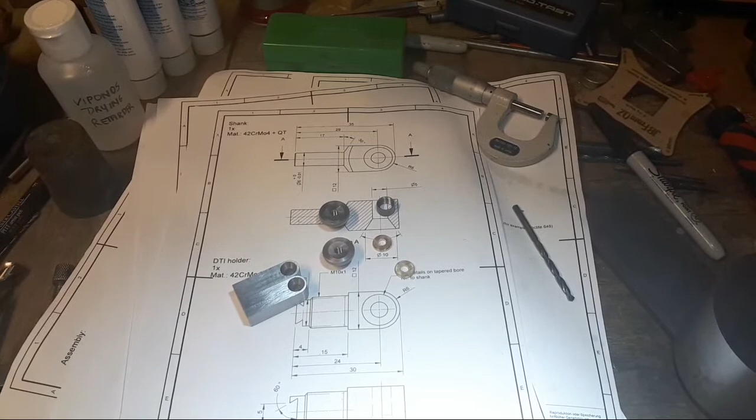It's pretty tough stuff, and you've got to cut a little bit deeper than the radius on your tool to get any finish at all, and that means a little bit of speed and a little bit of horsepower. And for single point threading, that's a little bit scary.

Anyway, what do I got, what's happening here? We've talked about that. Don't know, I got a piece of 4140 for that - flat belt pulley on the overhead drive. That's pretty awesome.

Craig, you're right, you've got to try a little bit harder and dig a bit deeper. Don't just try and skim cut it, get in and take as much as you can off at a time.

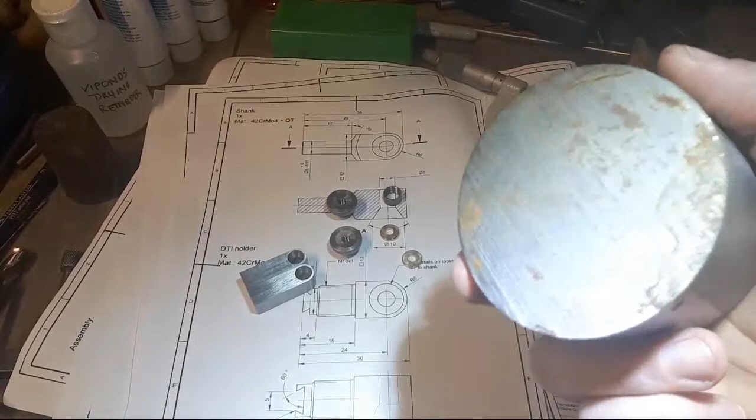A repeatable cross slide is pretty helpful for that. Hey Duncan - so that's a project, it's got to have an inch hole in it to go on the shaft, and there's a bit of a step on each end and a grub screw in the middle. That's all that's involved in that, and it should be right on size or a fraction bigger. Hopefully it's right on size, because I don't really want to machine the outside of it unless I've got to. But that's just a loose pulley for the shaft, so I've got reverse.

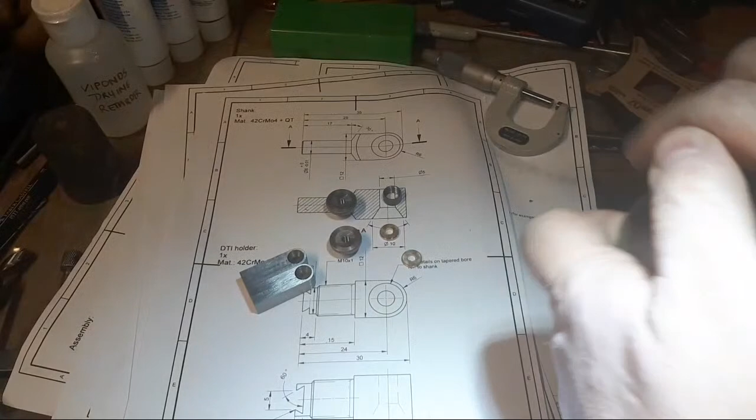That comes from Tasmania, from Tyne Valley Metals, or wherever he is up there, up behind Mathinna. Don't know why he's selling metals on eBay, but he's pretty good. It just takes forever to get here from there, especially at the moment. Hot Rod Guy, that's him. Seems to be the only guy that sells this sort of stuff in that sort of size.

Anyway, also got a bit of flat in the mail today. It's 50 by 6, that's for this project, which is the elephant in the room, I guess.

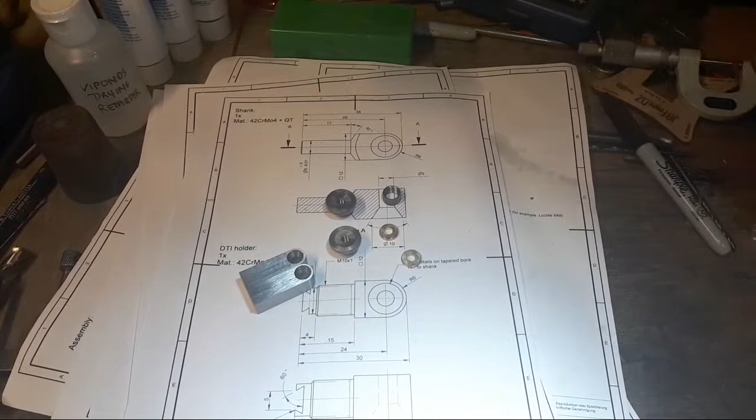Stefan Gotteswinter made these plans. You probably all know Stefan, he's a regular here, and he's got a pretty good channel, and he makes stuff. He's German. If you don't know Stefan, go and check him out, because he's an amazing guy.

But he made this set of plans, so these are getting a bit sort of oily, for this little indicator holder.

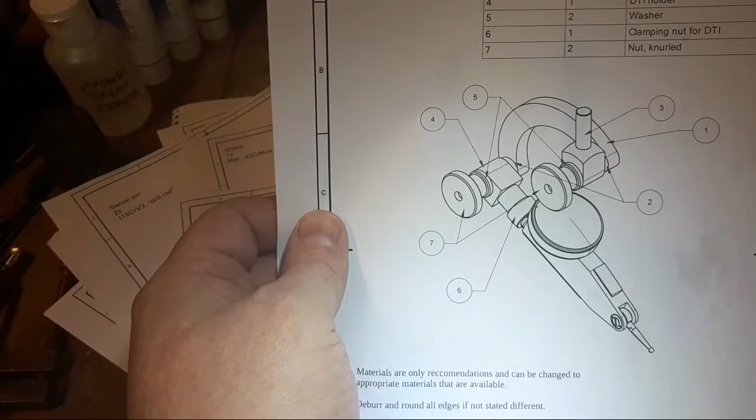He's kind of mad and a precision inspiration, if you want to put it that way, but don't speak too loudly, he'll probably turn up here in a minute.

He made this set of plans for this little indicator that he built, and it's sort of not as big as this drawing, to be honest. So I thought, well, I'll make a series of videos, and they're coming out. It's a fairly nice build.

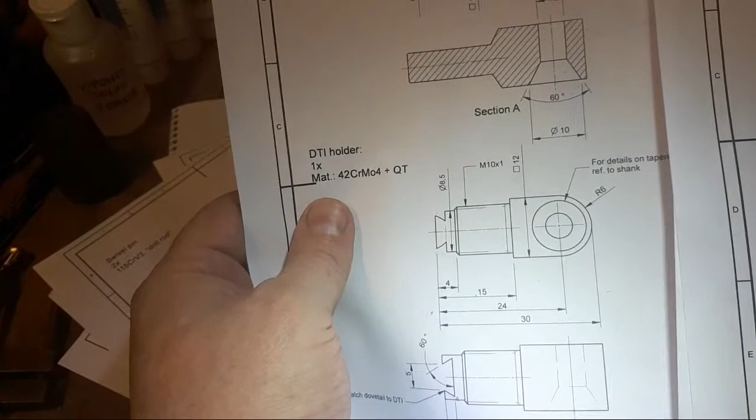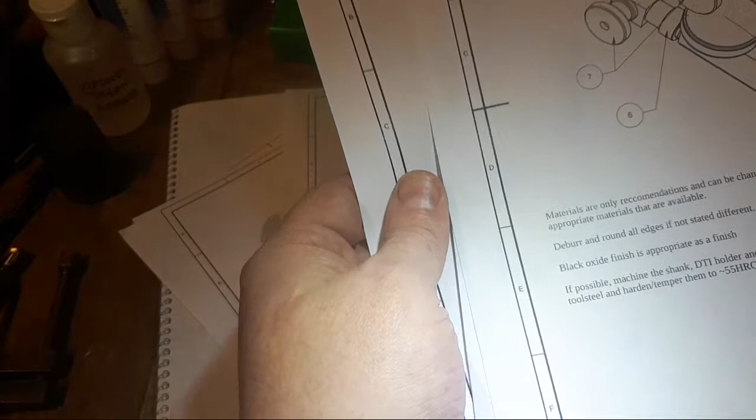He's probably listening because I just got a heart from him. So obviously he's digging in. Let's have a look at the counter.

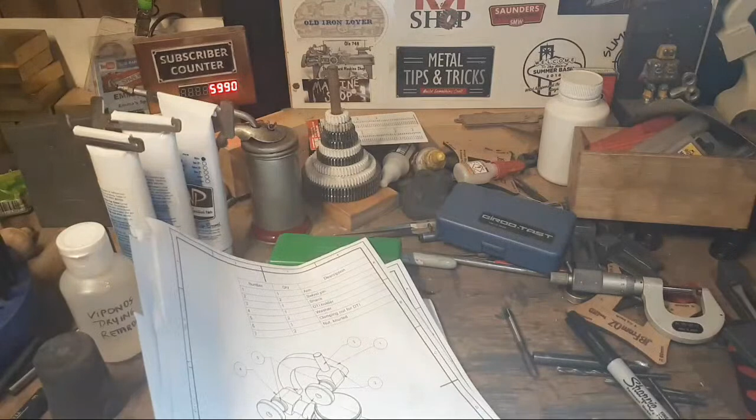So it's a pretty good little build, these plans are available to anyone. He did share them on Patreon, but he also, I think, shared them in the Facebook group if you're part of that.

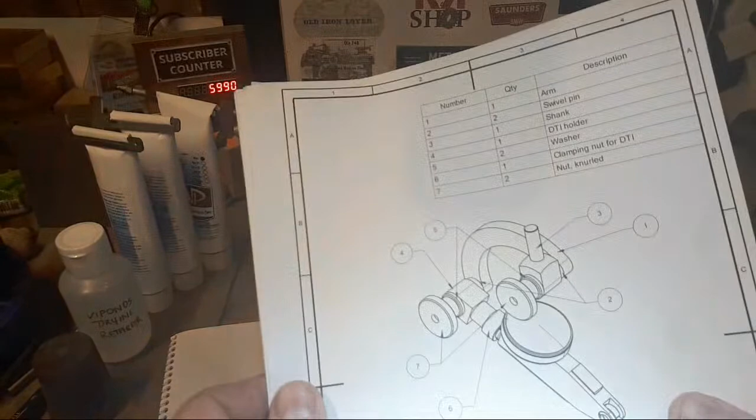I thought it'd make a pretty cool coat hanger too, but it's a bit flash for that. Anyway, where are we with it?

We've got 4 videos up, or 3 videos up. There's another one I uploaded, but I haven't actually looked at it yet. That's one way to do that piece, that flat.

I'm going to do it on the faceplate just as a half. I've been thinking about that. There are some challenges in it.

This little fine... oh, this stupid light. I'm going to switch that off because it's getting a bit of glare.

Well done, Aid, that's awesome. You've got a good channel, though, and you're a nice guy.

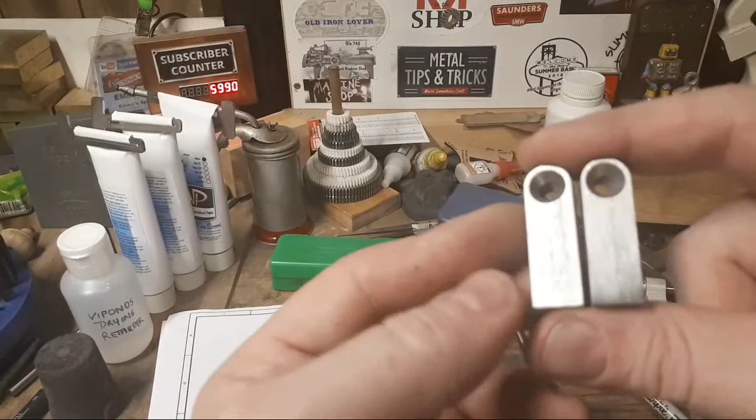So I do, you won't subscribe again, though. I just don't like my chances there. It'd be pretty funny, though.

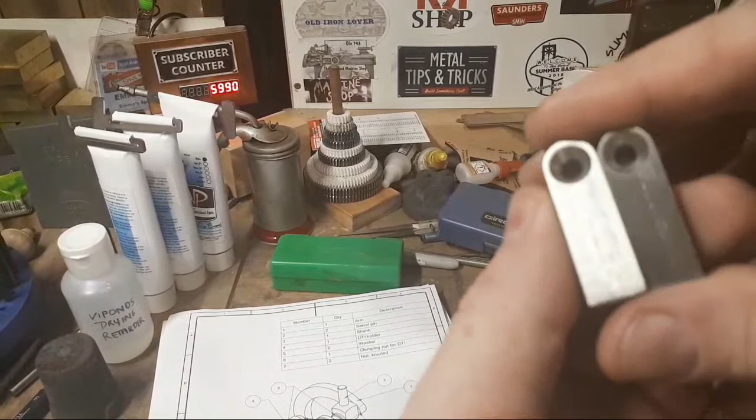So it's pre-hard 4140, but it's pretty hard. It's 45, 50 Rockwell and pretty tough stuff. Generally, when it comes pre-hard, it comes about as tough as you can get it as far as wear resistance, strength, but not particularly hard, so it's still machinable. If you soften it and then reharden it to 850 Celsius and then temper it to

about 500, 525, 530, something like that, you'll end up with this, which is excellent for wear parts and bits like that.

So, okay, standard pre-hard is 28 to 32. It probably is too. It's not as much as that, but it is pretty high tensile strength.

So one of them still has got to have a thread on the end of it and a dovetail, which is going to be fun. And that nut screws on there like that. And this one has a straight spindle to go in a collet or something like that. And then they've got pieces to go in there, and then that curved piece is cut out of this, I think. So this is a good project.

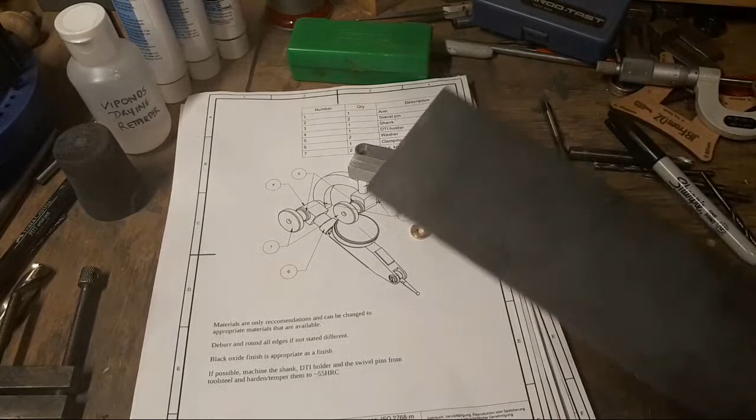These have all got to be blued. I'm probably gonna, I don't know whether I'm gonna color this, heat blue it, or whether I'm gonna just polish it, or whether I'm gonna throw it in the tumbler and give it that nice grey, abrasive finish, which I really like too. Don't know yet.

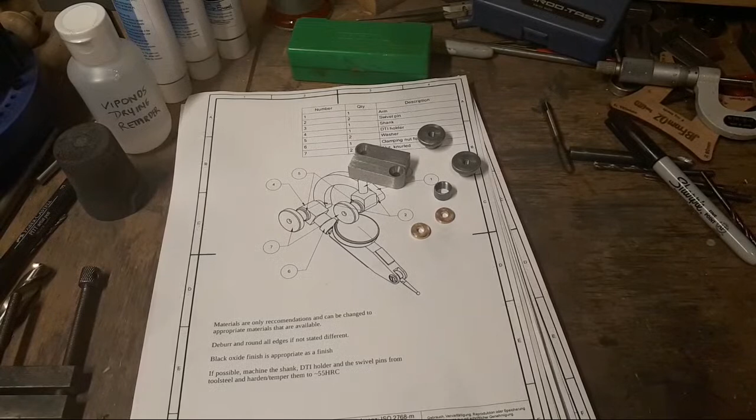Sorry about that. You're still looking at the camera, the counter. No, I don't even look at the counter very often nowadays.

I've got a couple of indicators that'll work with this. See, it's not going to drop off. It's smarter than that, see?

So I got a little Imperial Federal, which isn't a bad indicator. It's pretty loved, but it's actually not bad, and its zero's pretty good, and it doesn't need calibrating too far out or anything. It has got a bent or a slightly bent arm on it, which probably could be fixed too.

That's pretty awesome. That's what I probably would get to use more than anything. That's in thousandths of an inch or half thousandths of an inch, which is about where I like to work, something like that. I got Girod-Tast too.

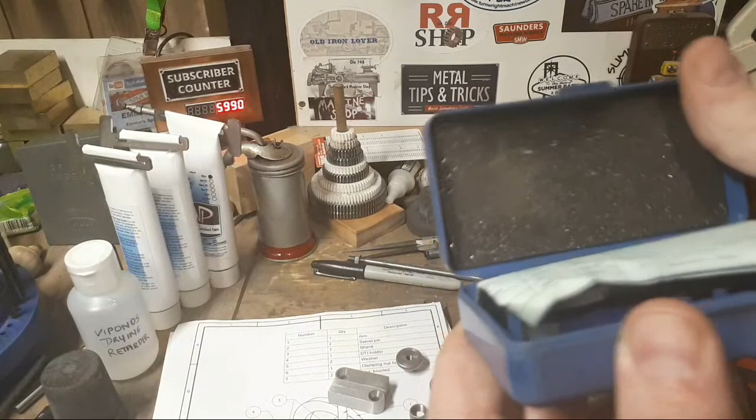Still hasn't dropped. This is crazy precision. Like, this is a beautiful indicator, but it's way too nice for me, really. It hasn't been calibrated for a little while. It's from 1999, so it's 20 years old or a bit more.

This is a really nice indicator, but it's way too precision and too precise for most of what I do. So at this point, I don't use that very often.

I've got a Starrett last word too, which is a different mounting system to the dovetail, but that's... here we go. We'll refresh that. There you go.

See, now you've done it. It's sitting on 0. This is pretty good. The last word

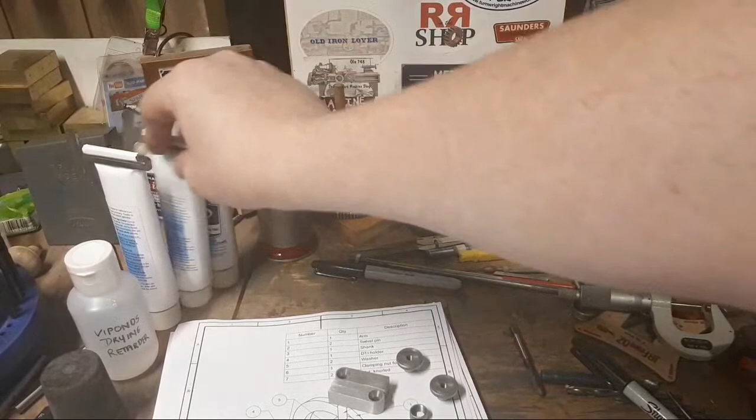Got some paint today, which is awesome, which means I can get on and finish my Coat Hanger 2020 project. If you're following, if you're even a little bit aware in this little community, there's this thing called Coat Hanger 2020, which is the Rustanox Coat Hanger challenge. Mine needs painting. I still have to paint the aeroplane for my coat hanger. So anyway, it's getting there. Slowly.

If you make things, join Coat Hanger 2020. That's pretty true.

Mahrs are worth fixing, Greg. Mahr indicators are usually worth fixing. Some of the others aren't, but they're probably worth fixing. And there are people who do them.

The resolution on the Swiss one, Craig. Second coat. Everyone needs a second coat hanger. It's got too many zeros. Thousandths of a millimeter. So that's crazy.

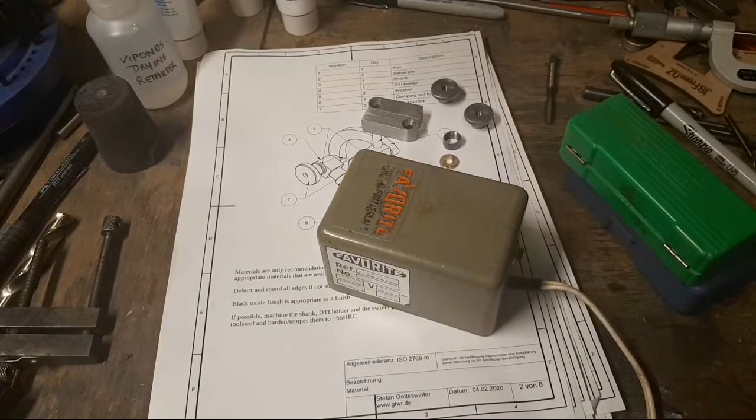What else? This is something that has been a bit topical at the moment. You should have, Ted. We expect content if you start making it. That's the trouble.

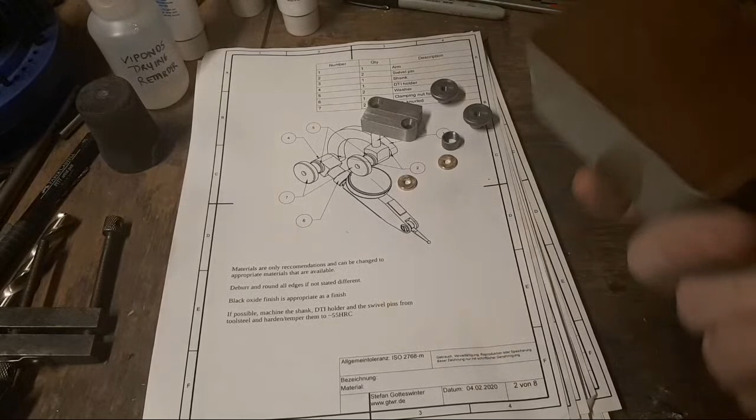This thing here, right? You should all look out and buy one. This is called a plate demagnetizer, or it's just a demagnetizer. There's a plate magnetizer, a demagnetizer. This one's a Favorit, which is now Horia, I think, which is the Swiss brand that's still going. I've had this for like 1,000 years. It's Favorit, they make good stuff.

They're now sort of absorbed into Horia. If you have a look at Horia, HORIA.ch on the web, there's a lot of stuff that you really would like and you can't afford there. They make lathes and stuff, and it's way out of everyone's price range. But this is a Favorit plate demagnetizer.

It's a pretty fantastic thing, really. I guess everyone's seen one, but everyone needs one, because to use it, you just drop something on it and press the button and pull it off, and it's just an electromagnet. If you press the button and push something in the middle and let it go, then you've magnetized it.

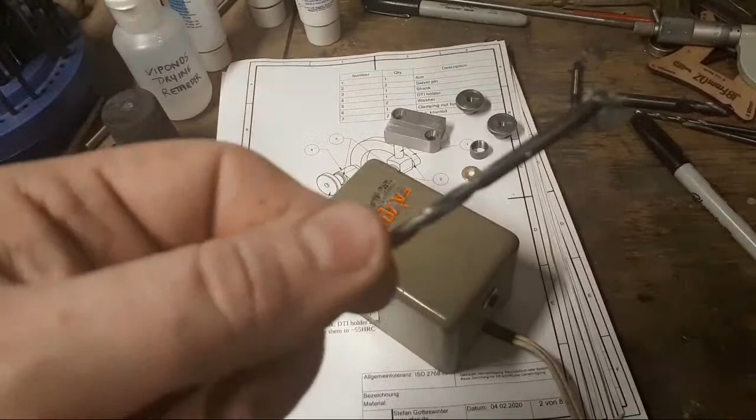We put this over here in the, see that? There you go. So you got a magnetic drill, which isn't much good to anyone. But if you pull it off like that and put it back over here in the swarf tray, nothing. Hey, Warren.

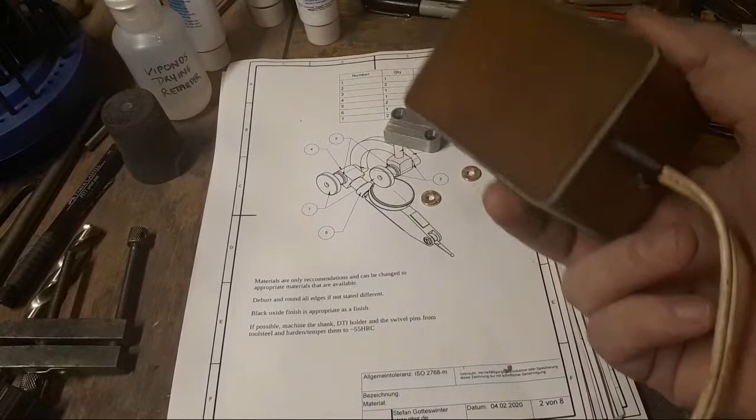So all it is, I think, is an electromagnet with a button. I don't think there's much else to it. And you press the button and the magnet polarizes the plate on top, and it'll demagnetize or magnetize something. So if you see one, grab one, because it's handy in a workshop, because everyone has magnetic tools and they drive you mad, especially at the moment with all these big conspiracies around. It's probably the 5G, but probably over time everything's magnetic.

Find them secondhand, like you'll buy it cheap. It's a fairly simple thing, and probably you can find a kit to make one without a lot of trouble. I believe, I don't know, this is all potted up, so I'm never going to pull it apart. But I believe that it's just a transformer or a coil and a plate.

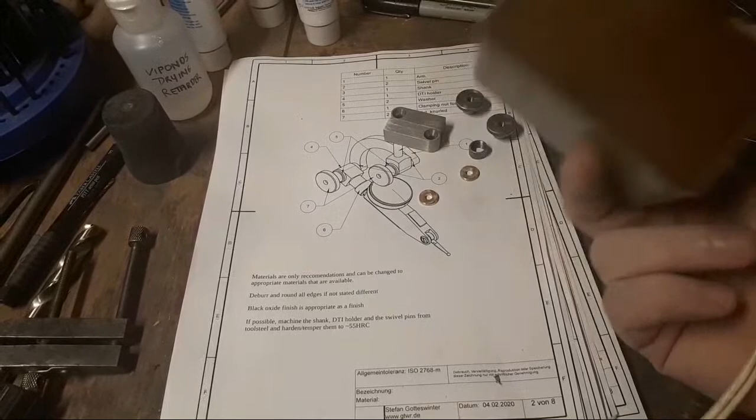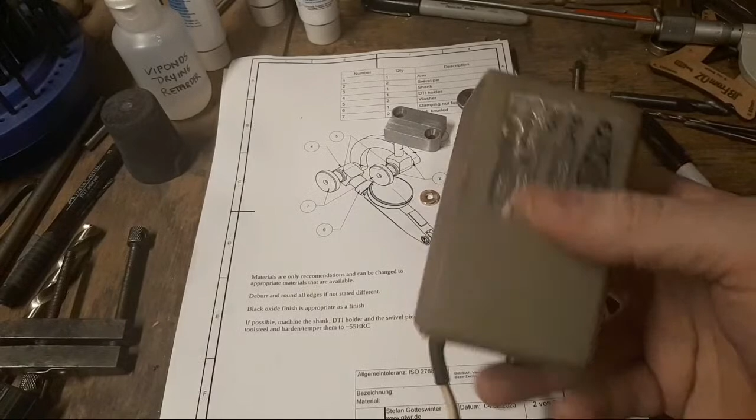But it's a good thing, and everyone should have one, because this has been around with me. It's been my bag to work once every couple of months for the last 10, 15, 20 years. And it's been here in the cupboard for the rest of the time. And every now and again, I'll pull it out and do it.

Yeah, magnetic calipers are the worst. This will fix them, absolutely. It's the thing. So if you find one, grab it. But don't buy a Swiss one from, it does say made in Switzerland, I think. Yeah, sort of. Don't buy a Swiss one, because they'll get expensive. People put a premium price on this gear.

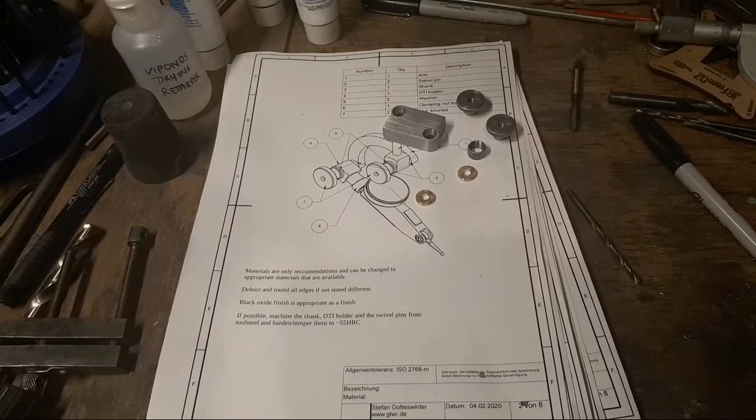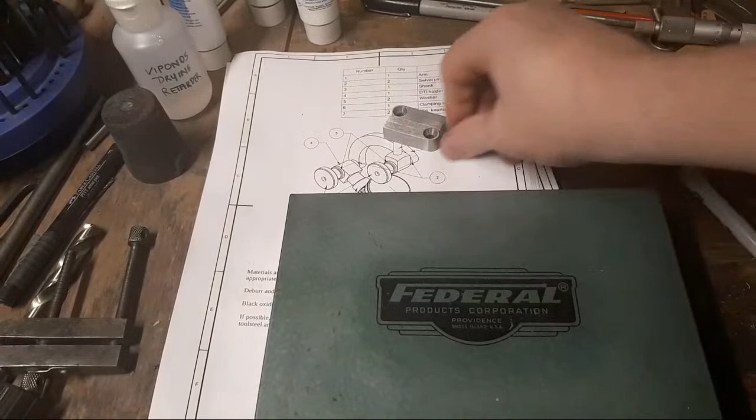I think that counts. YouTube subscriber algorithm knows that you've just unsubscribed. I think it's listening to your conversations, and I really think that probably you should get an ad blocker, or you should stop listening to the voices in your head and just pretend that it's not that important and subscribe anyway.

A bandsaw would be nice. It'd probably just use the buffered rolling average, like Craig says, whatever that is. This is another thing that I don't use often enough. If anyone has one of these and knows how to use it, especially you mechanic guys, do a video on it so we know how to set it up. I've got a rough idea and I know how I use it, but I don't want to make a video about it because I really don't think it's the way I should be using it.

This is a small hole gauge, from 1/4 inch to 1/2 inch, this one.

Chirpy, I have that problem too. That and Instagram creators. Instagram creators are terrible for giving me new projects. Don't know what to do about that.

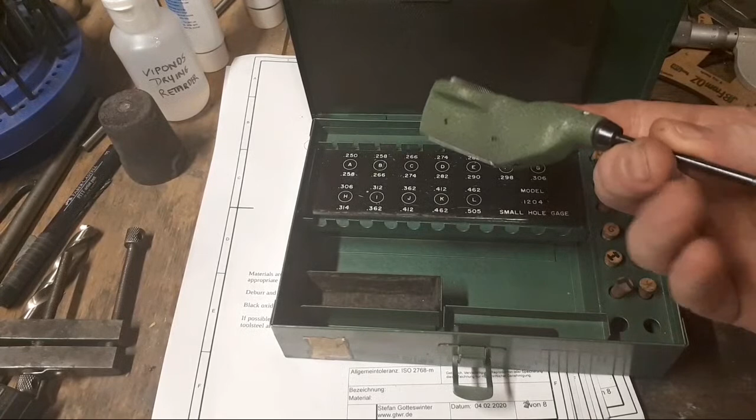But anyone who's a mechanic, I believe these are for measuring valve stem guides. It's a small hole gauge. I bought it on a whim and I use it, but I don't really use it for measurements. I use it for checking. I don't know if you can use it for measurements. If you can, I'd love a video from someone. Stephen Lang, we're looking at you.

But this one goes from 250 thou through to 505, so just over 1/2 inch. So you might know how to use this. Give me some pointers and I'll do a video, but I get it out occasionally. I haven't really put it on any videos because I really don't know enough about how to use it properly.

Yes, you calibrate it with a known dimension and then compare, Phil. That's the way I would use it, as a comparison gauge, but I'm not sure about that.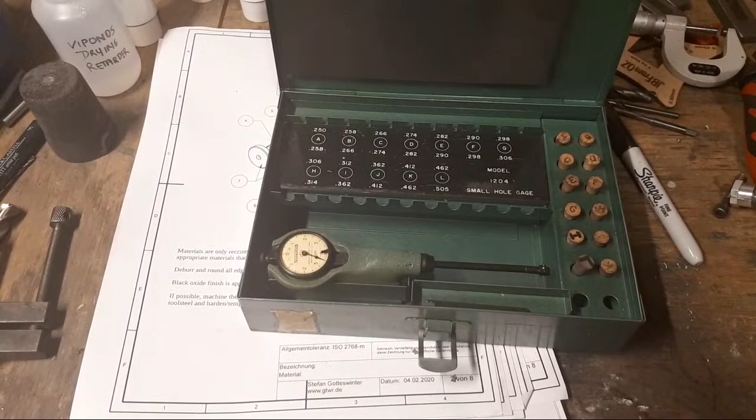I have this, which is a very useful thing. If you want a tool, let's have a look over here in the cupboard.

This is going to drive the price of these up. We'll get to that in a minute, Chirpy. This is going to drive the price of these up, and it shouldn't, because I'm still looking for them and they're a bit hard to find.

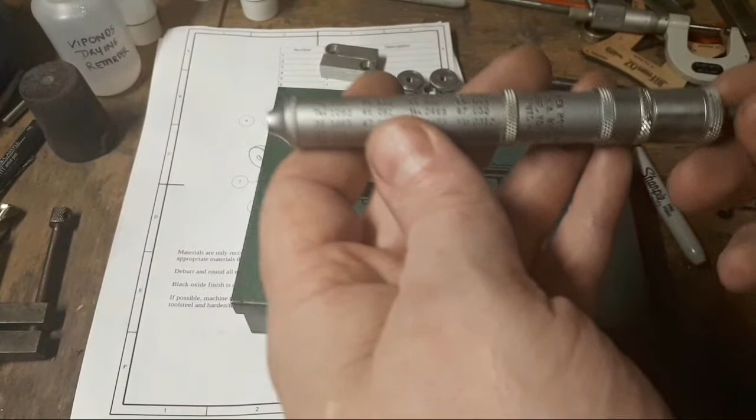This is a quick set gauge, or quick check gauge. It's a pretty basic operation thing, and if you've got a small hole to measure, you can do the same thing basically with a Sharpie and a sewing needle or something with a taper on it. If you push it in the hole and mark the sewing needle, then measure the diameter of the needle where it comes out, you'll get a reasonable dimension of how big the small hole is. However, this tool is designed especially for doing it.

And if you see them, grab them, or let me know so I can grab them. And all this is a tapered needle.

Let's see if we can focus this a little bit. Probably can't. There we go. We've got a tapered needle that pulls in and out, with a lock slider, and a window here that gives us a dimension on the rod.

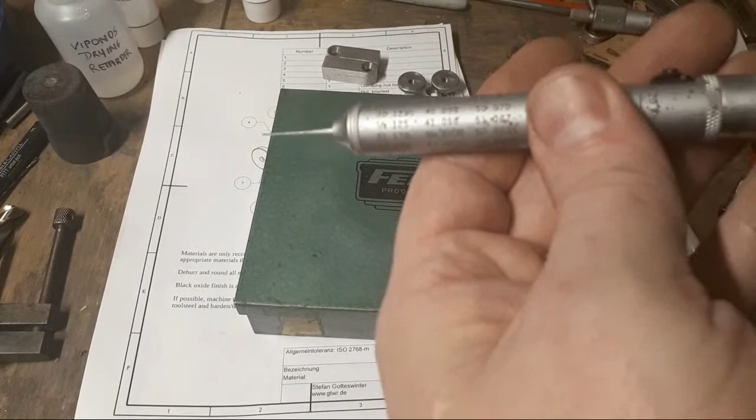So if we want, we slide that round so we can actually read it, and find that there's a needle, there's a line there and a dimension. If we want to measure the diameter of a small hole, what have I got here with a small hole in it? Really good question.

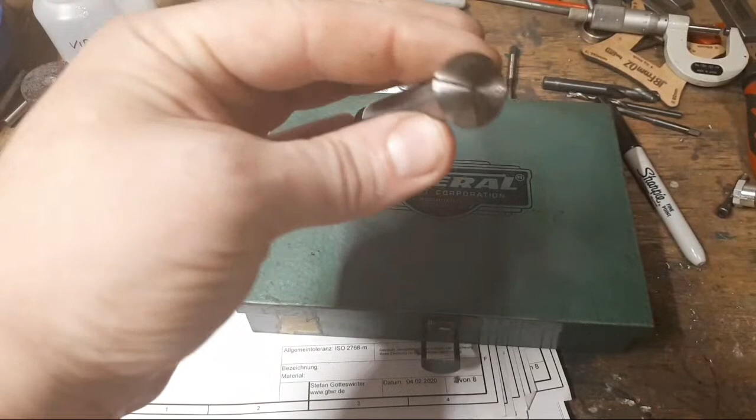So that's a pretty handy thing, and they come in different sizes, and I'd like a metric set for work, but it's never ever happened, and I could buy a new set, but they're kind of crazy expensive. But for what I do, they're a pretty useful thing to have.

So basically it's a cylindrical taper gauge, like Craig says.

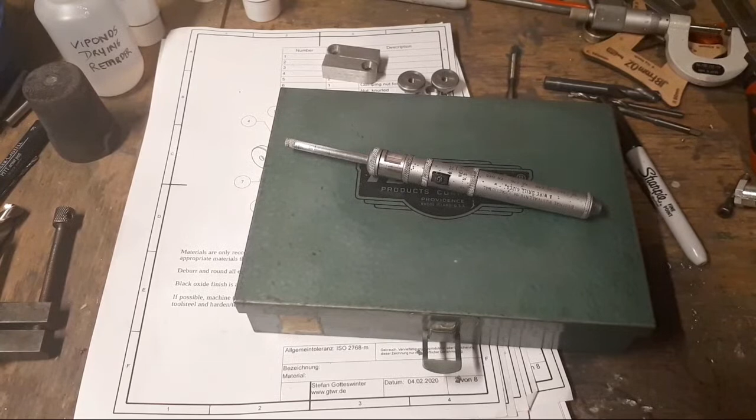Hey Rusnox, good to see you back. Coat Hanger 2020, go and check out Rusnox's videos. No video from me on Coat Hanger, but if you watch this space, it's not far away now. JB's got a Burnerd ER collet chuck, if you want to catch up with someone. Oh no, that's you. Okay.

So that's a tool that I use a fair bit, and for small hole diameters, it's pretty handy for checking. But gauge pins are nice, it's just that they get crazy expensive to buy a set. I'd love a set of gauge pins from, say, 1 millimeter up to 10 millimeters, but I haven't got room for them for a start.

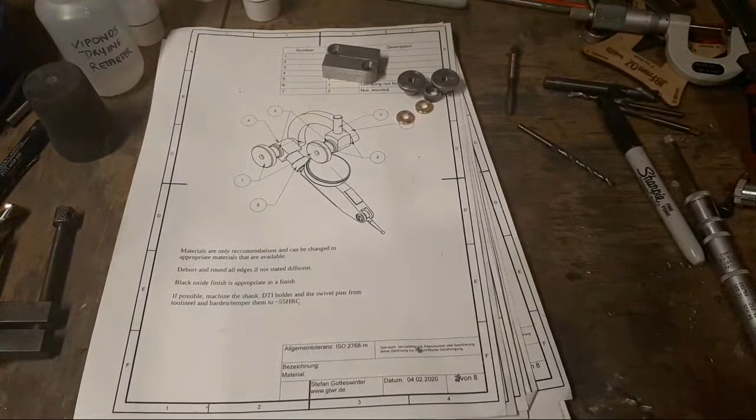Tiny to 1/2 inch is nice. Don't have the work for them. But there you go. Thanks, guys. Really appreciate that. Time to celebrate.

Speaking of Stefan, I've taken another leaf out of his book. Today, I guess by way of celebrating the 6,000, I bought a label maker. So I need to get some of this stuff organized. Everyone does this and it doesn't really work. You put all your taps in one box and dig around for them until you find the right one, then drop it back in the box like this. It's a metric tap, and you've got to look for it again. So thanks, Kevin. Thanks, Mike.

Make one that says 7,000. Good night, Poppy. I'll send you an email.

Never change it, leave non-square. It's square - see, it's an optical illusion. If I hold it in exactly the right spot, it is square. Look at that. It's less square if I put it out there. But anyway.

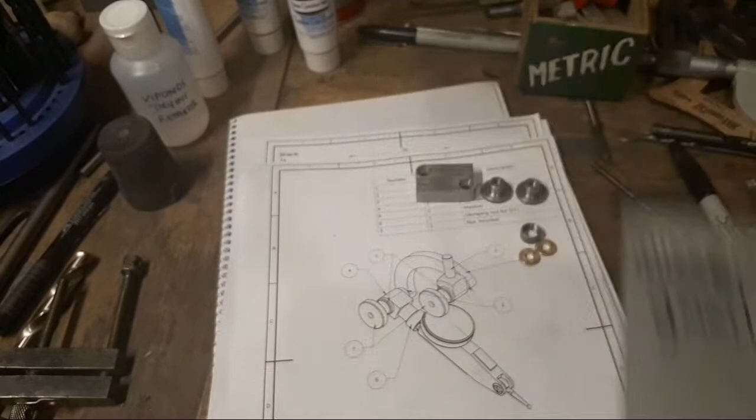Chirpy, yeah, look, there's going to be some engraver footage for this. There's some work that I'm going to do with that. It's got some problems still - my pantograph engraver has some issues in that it's got some backlash in all the joints, right? It was probably okay when it was made, for about a week, but it has worn a bit. So there are ways, I think, to modify that, and it's one of the jobs that I'm going to need thread cutting for. So at some point I think that will happen, but right now it's kind of a little bit shaky, and you've got to be a bit fussy using it because you get a little bit of error and a little bit of backlash, and that's not particularly good when you're engraving.

Take care, Cam. Good to see you. Good to see a video this week.

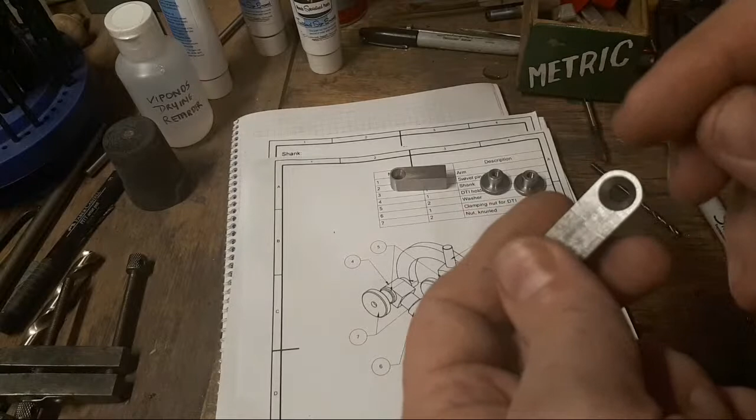Anyway, so I intend to get my pantograph going properly, and it's not something that I've forgotten by any means. I've put a fair bit of time into it already. It just needs some backlash taken out of it, and probably with tapered seat joints. I think if you make the joints on a taper, something similar to this, with an arm that goes through on a taper with a reamed hole with a nut, or a screw that locks down into a reamed hole with a lock nut, I think you would find that you would alleviate a lot of backlash that way, rather than the parallel holes that are already in the arm. So that's what I'm working on.

But eventually I'm going to have to make new screws. I'm going to need thread cutting. So I've got to finish the thread cutting attachment. And yeah.

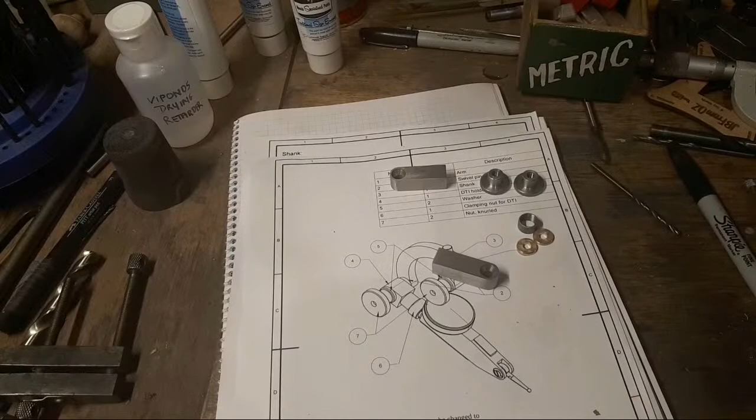John's probably a bit like me. I sit down and I film this project in detail, so there's going to be about seven 20-minute detail videos - making this part, making this part, etc. But you need time to do that. It's a fairly labor-intensive process, and you don't end up making a lot of progress in the limited spare time you have doing that. But it's fun.

Who's this chirpy guy? He keeps making funny noises over there in the corner. I don't know what he's about. Anyway, yeah, I don't know if anyone knows what that chirpy guy's talking about.

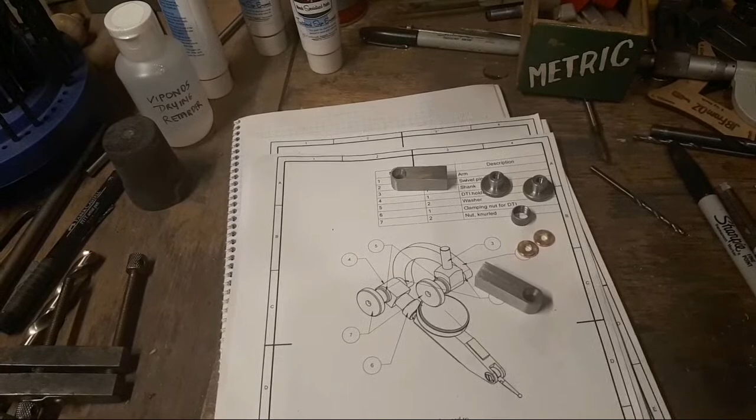Look, steady rest. It's right here. Okay, it's awesome. This is what I'm saying about buying one-off castings, right?

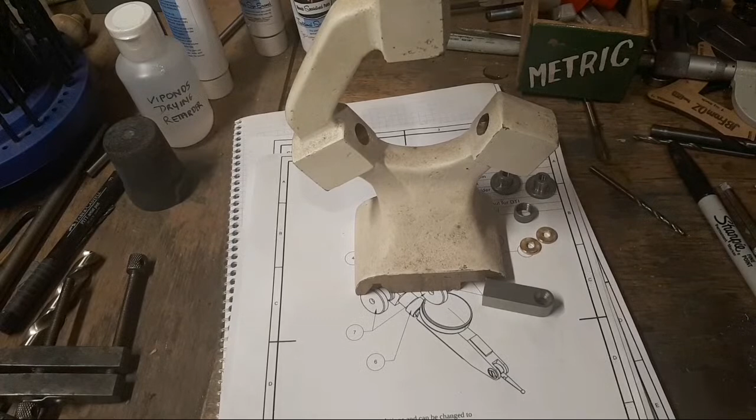Bondi Hack seems to have sorted it out. Chirpy can talk about this because he's actually done this and he's good at it. So Chirpy's qualified to criticize on this. But this is the one-off casting thing, right?

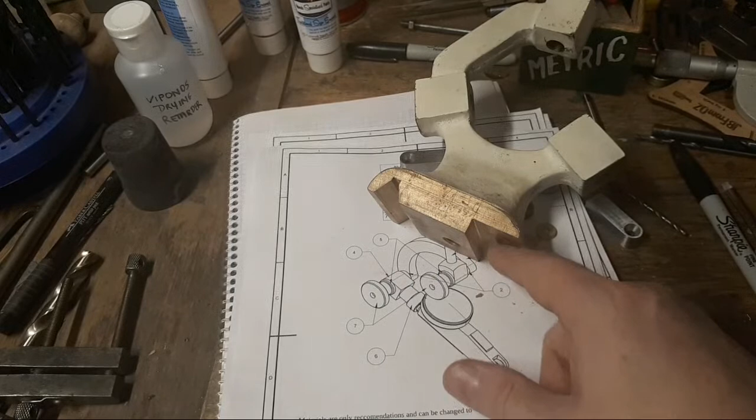This has some issues. One is that making this actually fit the bed is almost impossible to machine without having the bed there to try it on while you're doing it. I think it needs 42 thou out of this side, which is nearly a millimetre, to bring that up so that it sits on the bed. It's probably a fairly straightforward thing to do. Hasn't happened yet.

Can you get the file out? I can set it up in the shaper. I haven't got any machine with that much space to set that up and actually machine it, so I've got to go and borrow a friend's machine to do that. However, the big problem with it, more than anything else, is that it's back to front.

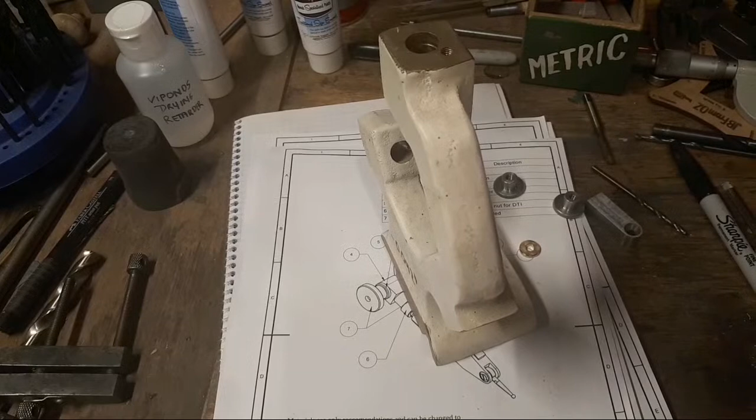Right? When you put it on the bed, the open-shut side's on the back, so any pressure you're putting here you're pushing against this and opening this out rather than pushing against the back. Now probably that doesn't make a lot of difference, and probably it's fine.

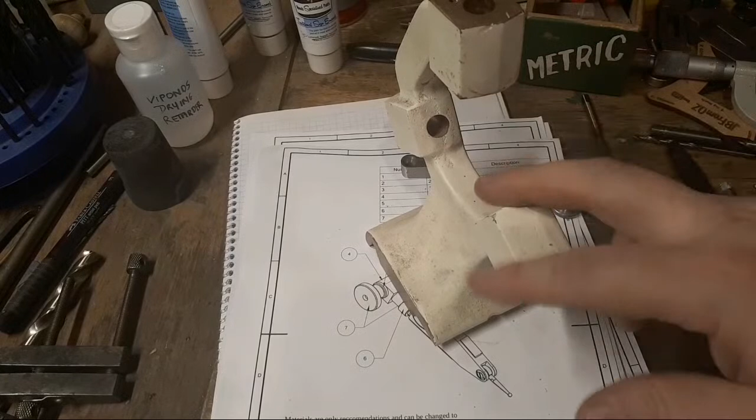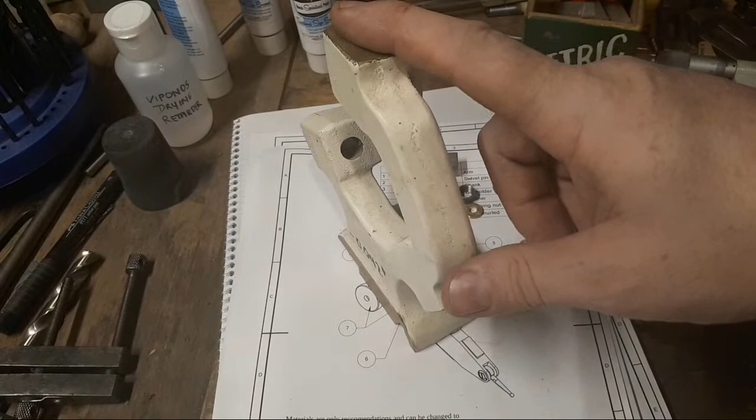But that's one issue. The other issue is that one of these holes, for some reason, didn't line up with the others. These two seem to be pretty good, this one's quite a bit out. So whether I block these up and do it again, or whether I pour this back in and get another casting and have another go at it, I'm not sure.

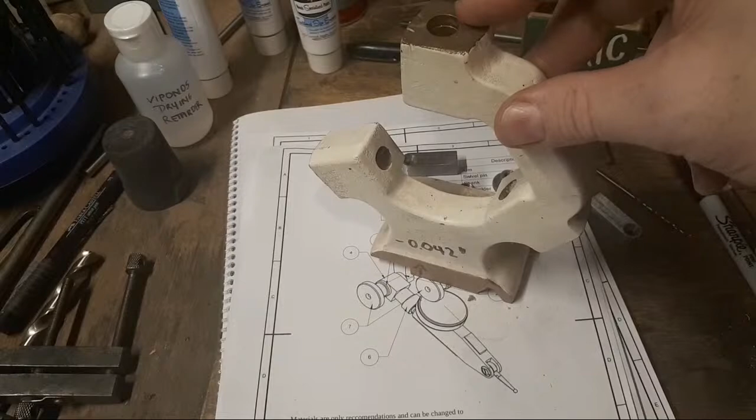Probably you could, but I really don't want to do that. I'm of the idea that there will be two ways I will do this in the future. I will fabricate one and get someone to cut out the shape for me properly and make it fit, or I will modify the pattern a little bit and get another one cast and start again. Or, good enough would be just to thread this and make an insert to go in there - I've got a piece of material the same, and Loctite that in. I think you could drill wherever you like on there, and I don't think it'd move much, so it might tig up nice, but - don't know.

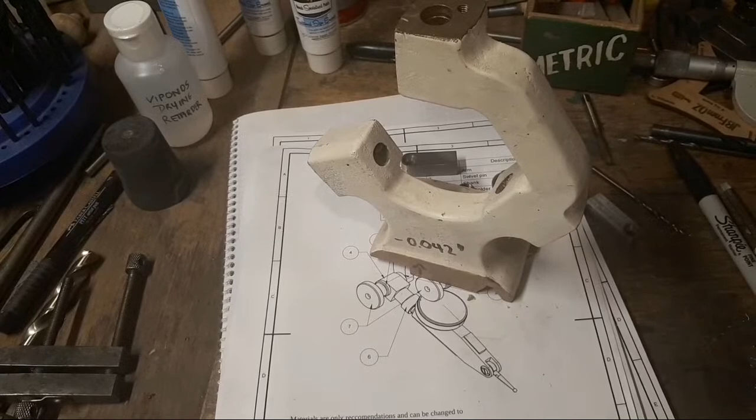I know some use wire cut machines, but that's kind of expensive. It does produce really nice results. So I'm sort of leaving this here for another month or two until I decide that something needs to be done. And then we might get into it and do it, and we might fix this one. We'll see. But you could probably braze it up, yeah, and that'd probably be plenty good enough. But getting braze all the way down in here is a bit tricky, so maybe you could just braze each end and leave the piece in there. Not sure, but I reckon thread might be the best.

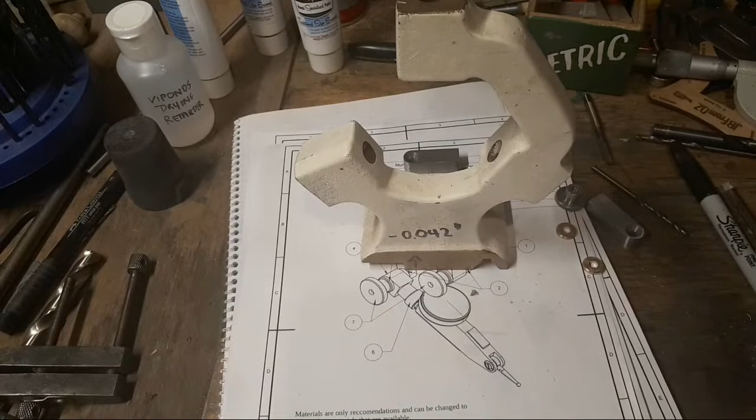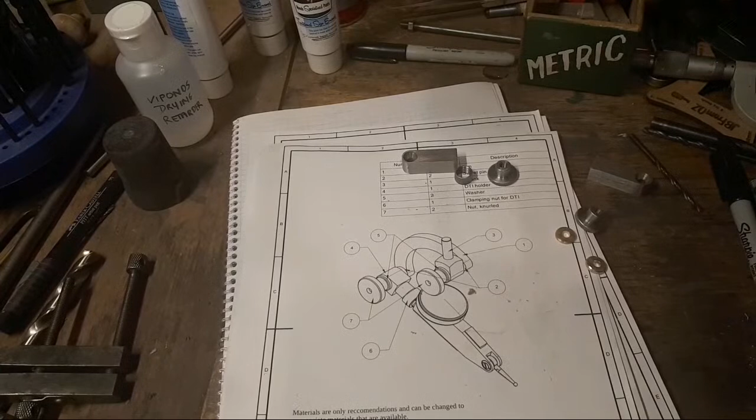So mostly this is just awkward casting, and there are problems with it. It's a prototype, and as a prototype casting, things never go really strictly according to plan. Sometimes you get lucky, and people send me emails saying, 'Oh, I don't like your foundry, man, I don't like the work he does, I wouldn't trust anyone who has that sort of setup with a dirt floor,' etc., etc., etc. But having said that, right?

Look at this. That was one of my castings, the steady. So yeah, I can't blame anyone else for that.

This casting is crazy good. Yeah Chirpy, you're right, but I've had comments about that. Wooden flask and concrete and dirt floors are a bit amateurish, apparently.

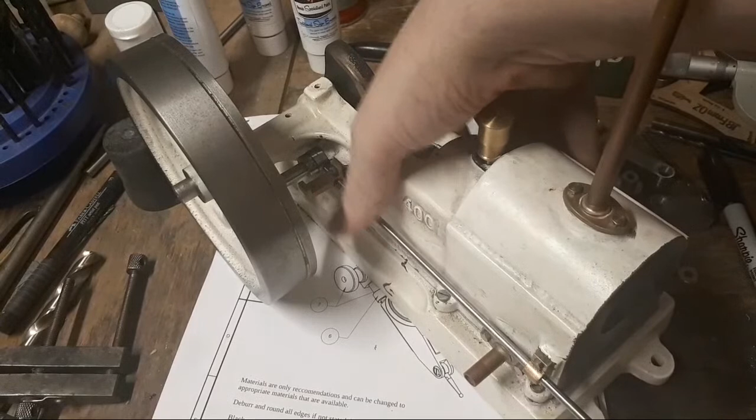This casting in iron is crazy good for a first off, right? It's accurate, it's precise. There's no drag in the sand when it's been pulled out or put back in. Look at this cam, clears there perfectly according to drawings. I took probably 5 thou off there to make that fit off the casting.

Crazy good, nothing wrong with this. So if you're looking for someone to make castings, Clark's your man, and he's good at that, but he's in America. There's nothing shabby about this, really.

He's put a lot of work into it, yes. And there were problems with this, but they're as much in the pattern making as in the foundry work. And if you'd cast another 2 of them, I'm sure he would have got on top of it, right?

We had some sand wash out in here and in here, and that's because of the metal turbulence when it comes in through the mold, I believe. That's probably a lot to do with the angles and the draft and the curve in the pattern as much as anything. We're coming from a fairly thin wall here into a fairly thick portion here, and I think that's probably what's disturbed the sand and washed it through, so we've got sand in the castings.

That was the main problem with this casting. But apart from that, we'll forgive him on that, because if he'd cast another one, he would have got it right.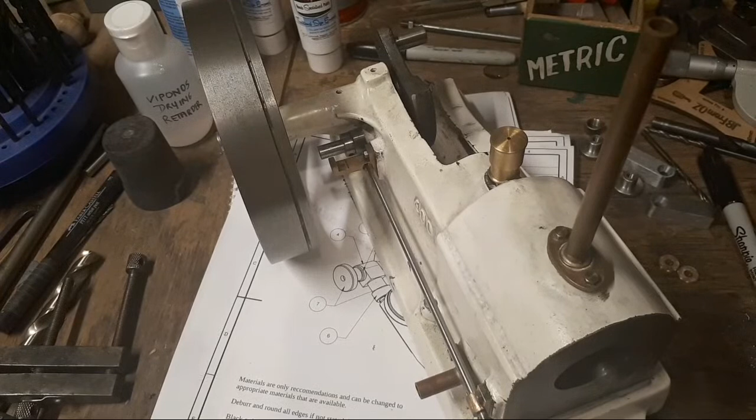The bore's fantastic, it's really cleaned up pretty good. I've cursed this casting at times when I've been machining it, but the main problem with that is that my machines are too small for this project.

And what you don't realise is how crazy big this engine is. It's a seriously big project. Anyway.

That's not a bad casting, and it's a pretty good job as such. Chirp is pretty good, actually. He knows stuff.

What does the engine weigh, Emma? What's the engine weigh, Craig? About 6 or 7 kilos so far. That's 12, 14 pound.

Yeah, we need to know more about Chirpy's casting. He's not as dumb as he looks. And I shouldn't even say that. Sorry, Chirp. He tries to pretend he doesn't know much, but he doesn't fool anyone really. I guess that's where we're at with that.

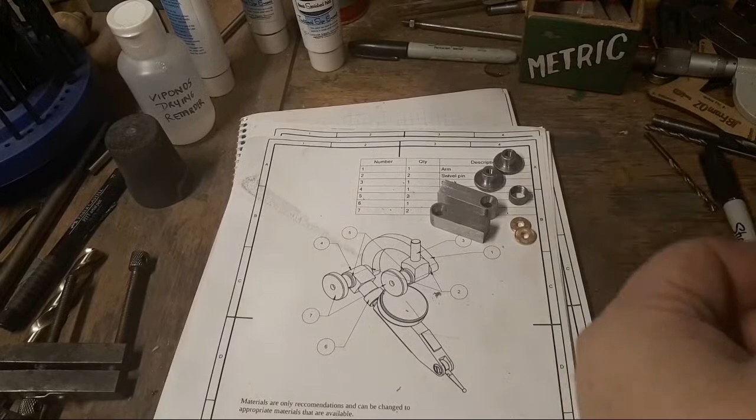I got these by mistake. Well, not by mistake, I don't think there was any mistake about it, there was just a lack of knowledge. They just sent them because they probably thought they were all the same, but these aren't what I ordered. We talked about them a few weeks ago. I need to make a tool holder for these.

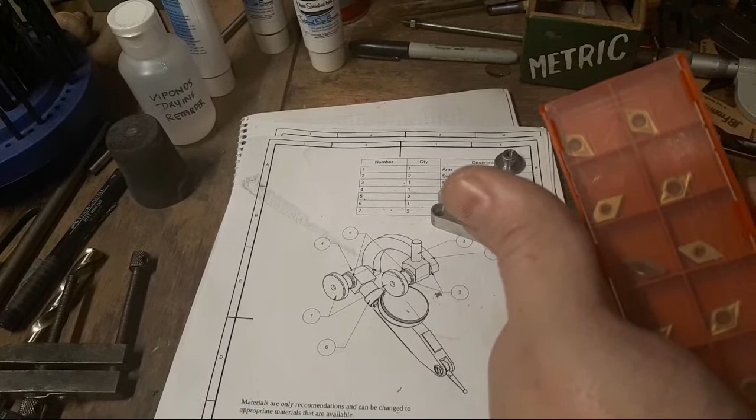If anyone's got drawings on how to make a tool holder, I'd be keen, because that's a project I'd like to do.

I don't like a quick change tool holder, just something to hold these so I can use them. Where can we find these, Maddie? I don't think Stefan would mind if I sent you a copy, so I might do that. You can hit him up, or have a look in the YouTube Machinist group, they're actually on there. Also, they're on his Patreon page and probably on his website.

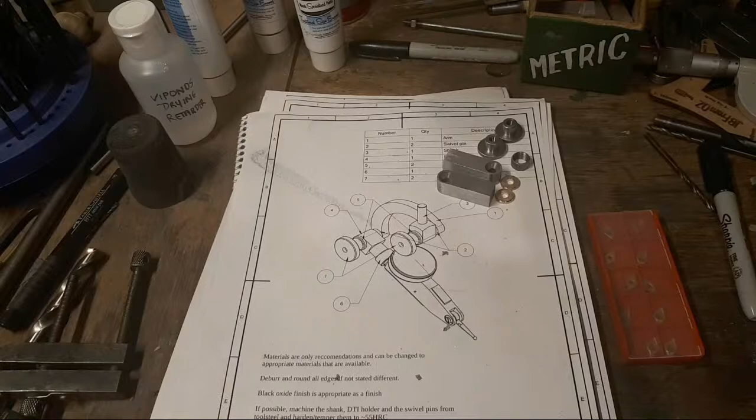I saw that, Kevin. That's not a bad idea. Matt, you need another project. How's the boring head going? There we go. Now, don't email him about the plans, he will never get back to you, he's hopeless with that. Life's too short.

Yeah Craig, when are you doing the Z-axis? That's right. You're not alone. We totally expect... yeah, we want more out of all of you. Make more videos - no, just make cool stuff and post pictures of it. You don't have to be Mr. Pete with 1,000 videos, but we will go back and watch some of them eventually if we need to.

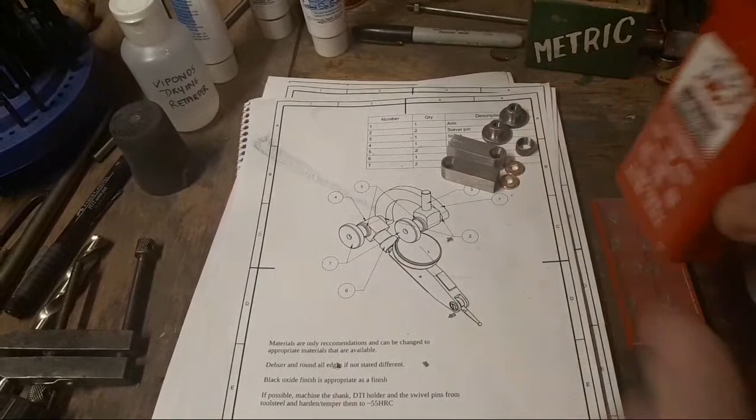Anyway, here's another thing I've done this week. Look at this, paper drawing. Tap Magic bottle - are we impressed? I would be very impressed, because no way last week I would have put that down on the sheet of paper.

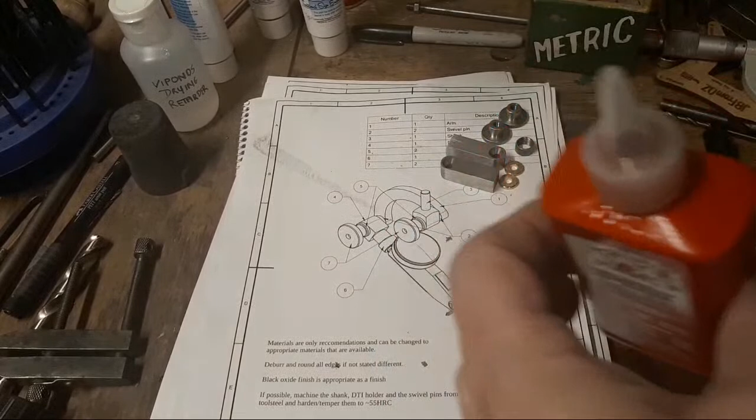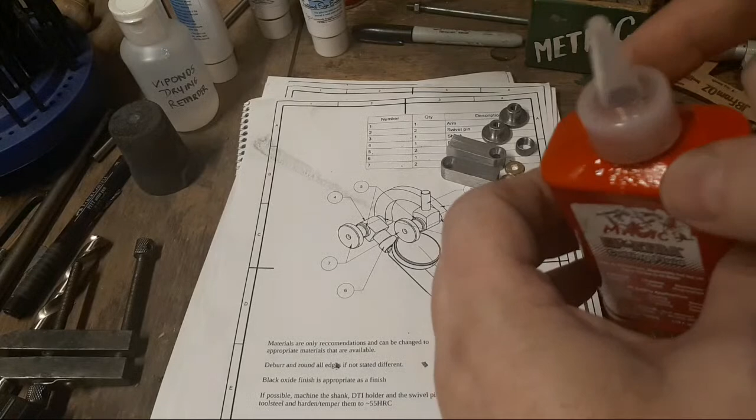When I got looking at this bottle, it just had one of those paper seals on it, like a milk bottle with a tab you peel off, which isn't good enough. When you unscrew it, take that paper piece off and screw this back on, there's no seal between the bottle and the spout. So when you tip it over, it drips down inside there, and when you tip it back, this runs out - that's what I think's happening. So I've just put a fibre washer in it, and it seems to have fixed the problem. A little bit impressed about that. There's the answer for the Tap Magic bottle, the Mark II plastic one - we can fix that, put an O-ring in it, or put a fibre washer in it.

Oh, Myford Boy's still there. We were going to talk about him too. We should give his engine a run. Chewing gum's good - we should give Myford Boy's engine a run.

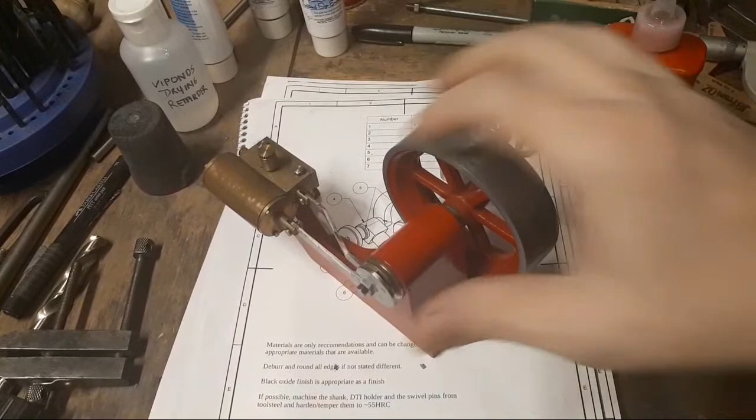I can't remember what I asked about. Yeah, you did actually - they went quiet on that, Craig. Don't stress too much. Obviously it wasn't all that important, but I'd forgotten what we were talking about.

Sorry about that. Now, this is a Fairfax Engines casting kit from England, from a guy named Myford Boy. Hit him up, because I believe he's still selling these castings - I don't think he's got to the point that he's not interested anymore.

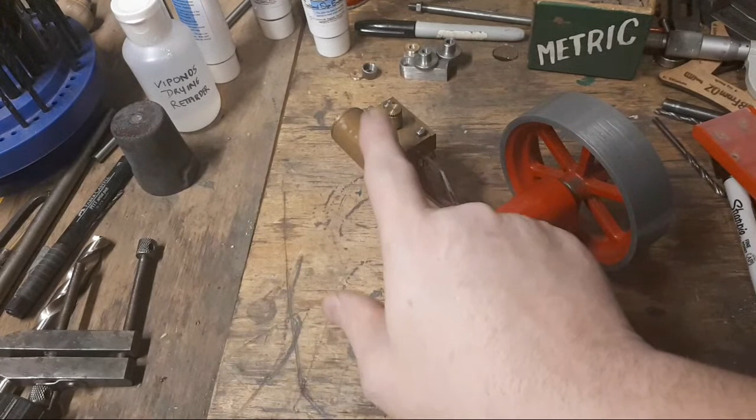But this is a pretty interesting little engine to build. I believe this cylinder and valve gear is the same on his little traction engine build, so that's a really clever design. This is a really nice engine, it's got a slip eccentric gear on it, which is pretty clever, and it's well designed, and it works. There are some interesting setups in this casting, which me and a couple of other people I know have attempted and got caught up at that point. But everyone needs a challenge, and it's well worth doing, and it's a pretty nice little engine.

It's certainly better value for money, this engine, than say a Stuart Models or something like that, which probably hasn't got particularly good castings nowadays.

I did this without a milling machine. There are videos way back on building this. I built this without a milling machine. It would be much easier if I'd had one - it would certainly make the job a lot easier, but you can do it.

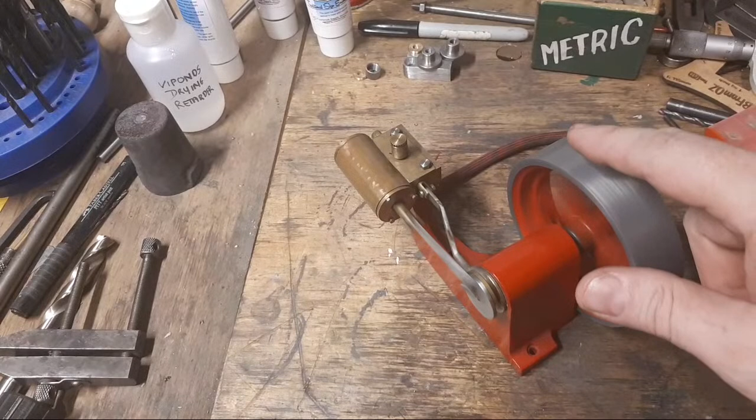Go and check out his website. This casting is a zinc alloy - it's quite heavy, this flywheel. And this one's just an aluminium casting, I believe.

And the drawing kit and the instructions are fantastic - that's where this shines. I believe there's some variations.

Mine's not as good as Myford Boy's. His will run nicely on an aquarium pump. Mine won't.

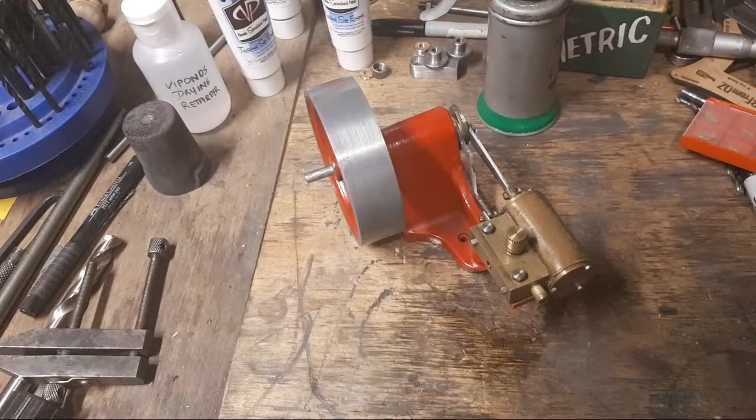Anyway, we're probably nearly done here. I've got to work tomorrow, I've only got 5 hours or something tomorrow, and then I'm going to come home and I'm going to make a pretty good effort. Hey, another thing I did, I was going to show you all this. I'm pretty proud of this. This is awesome.

It would be awesome. It would be crazy cool if I knew where they are. Oh, here it is. Look. Look at this. I color-coded these oil cans as per promises.

So this one's gear oil, and this one's engine oil. So that was another job that I did this week. There you go. That took all day one day.

I also made it all the way through Myst, the computer game. So there you go, I got to the final screen. It was a total disappointment and really an anticlimax. I'm disappointed I wasted all that time on it now, 15, 20, or 25 years ago, whenever it was, because it's not worth doing. So that's the end of my gaming for the foreseeable future.